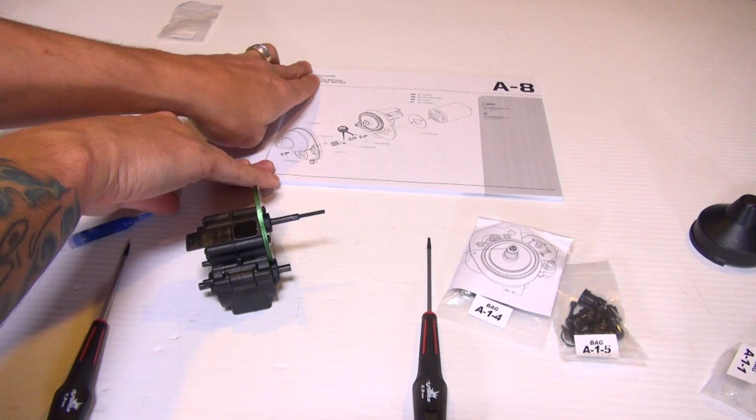What does step 7 have for us to do? Aha, we're assembling the slipper clutch. What is a slipper clutch?

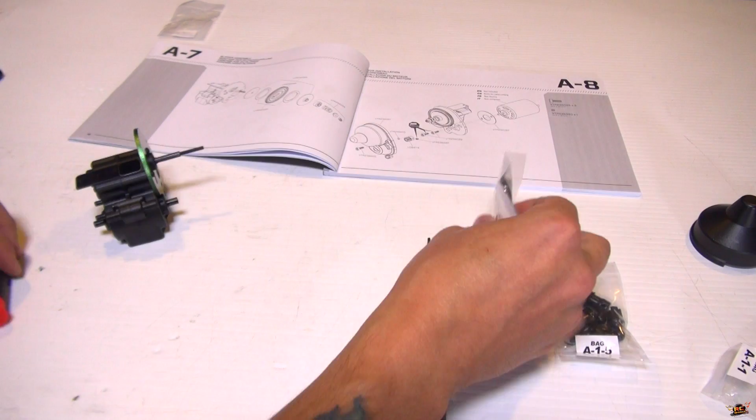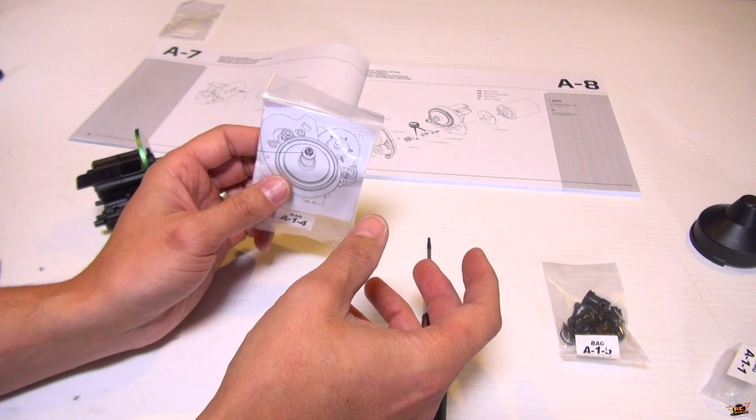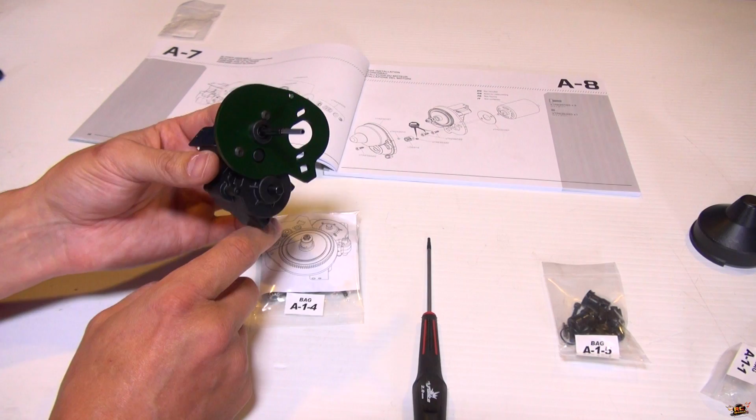I'll tell you for those that don't know. A slipper clutch is basically a spur gear, a spring, and a slipping system that activates when your wheels are having a hard time turning because they're bound up in a tree root, you're in too much mud, or you're trying to pull weight or pull your buddy out. If the motor is torquing the transmission too much, you don't want all those little gears inside to snap their teeth, because once that happens, you're going to have a lot of work to take it apart and replace it.

So they came out years ago with a slipper clutch that, when it torques too much, you can use the adjustment screw and spring. So if it does torque your wheels too much, your transmission wheel will actually just slip instead of transferring the power back to the transmission and breaking those teeth.

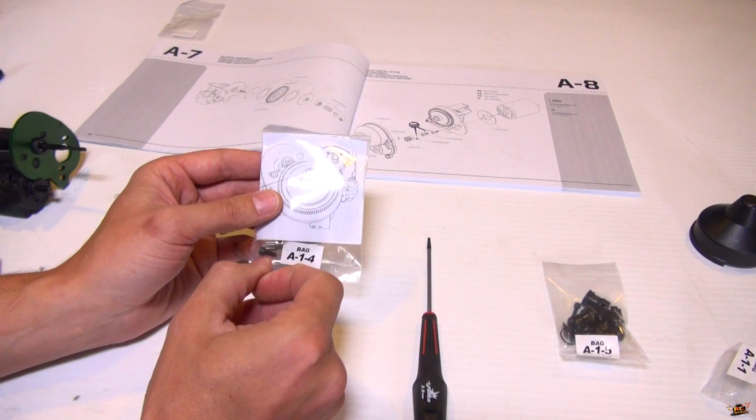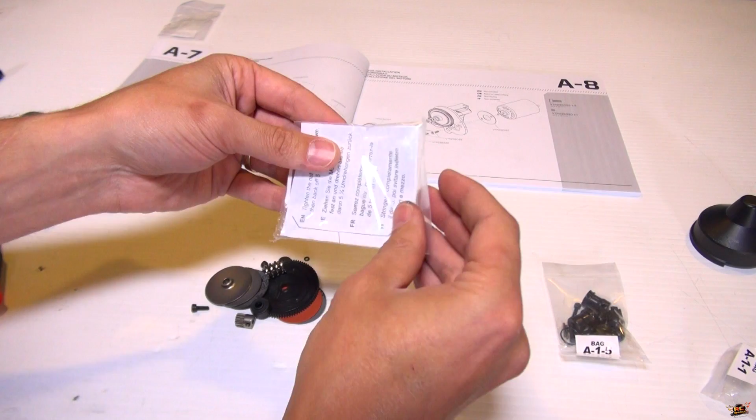So bag A-1-4. Let's slice in, see what you got for me. Okay, very small parts, so I want to be careful here. And instructions as well: tighten the nut all the way down, and I'll get to that in a second.

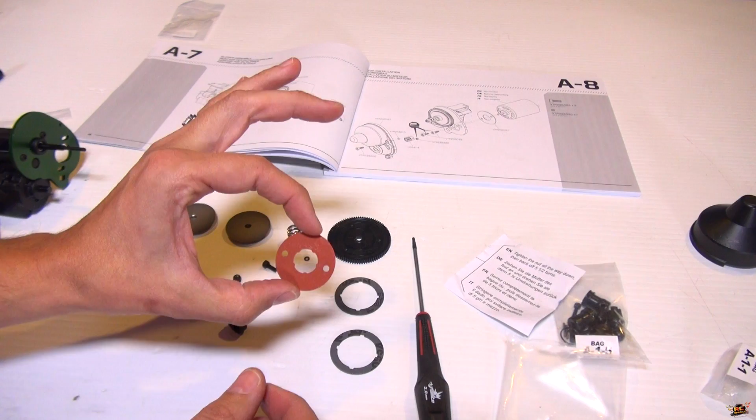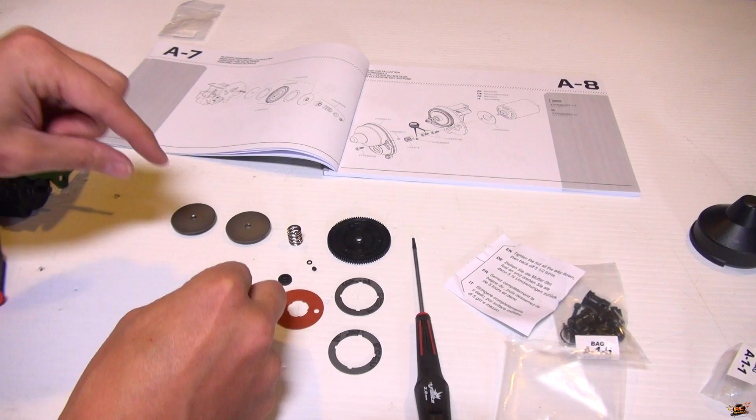Then back off 5.5 turns. No problem. Let's look at the parts we have here so you guys aren't intimidated if you're building. Here is the spur gear. Here are parts of the slipper clutch. Here's the slip plate itself. There is a very small set screw, a very small washer, a larger piece of plastic, a little round O, 1, 2, 3 screws, and a piece to match the big O with a nut and a pinion gear.

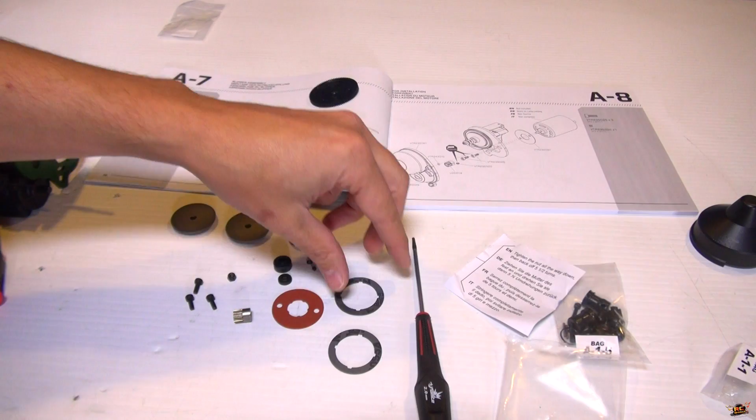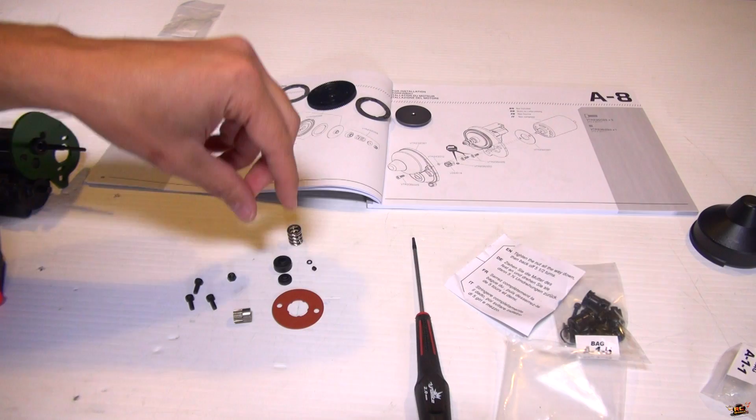No worries. So what am I looking at here? If I lay this out like I discussed earlier, there's one. This one's going to go on the front. This one will go on the back. Where is the plate? Here's one of the plates that will attach to the transmission housing. And here's one on the front, followed by this piece, the spring, and it looks like this fella, and the nut.

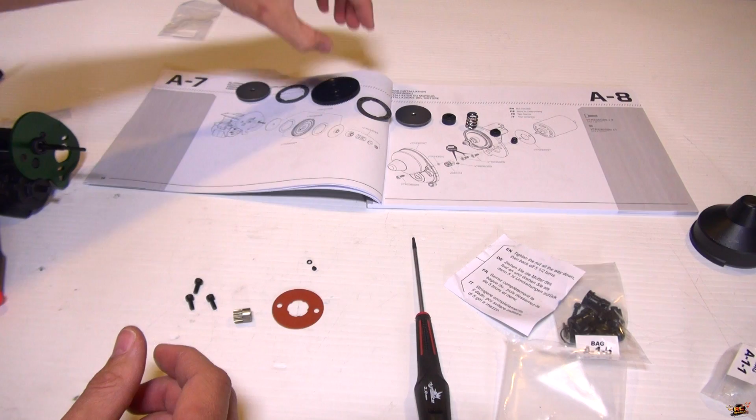Okay, so this long line of parts is going to assemble in a very simple way, if you'd like to see. What, do they have a step number 1? Nope, they're just going to let me go ahead and do it. No problem. So with this one, these will be different on the back. Nope, they're identical. That's what assuming gets for me.

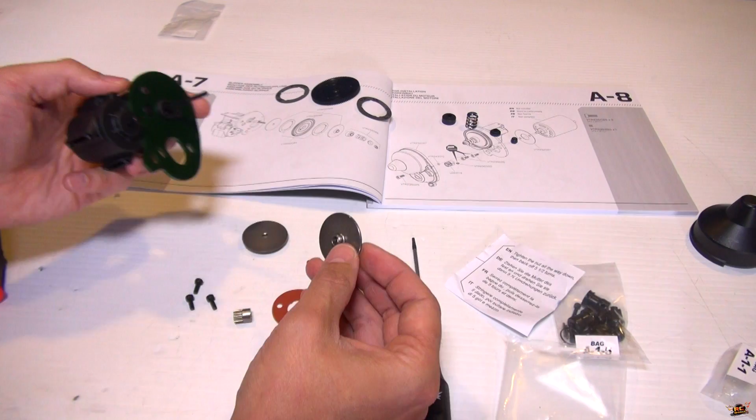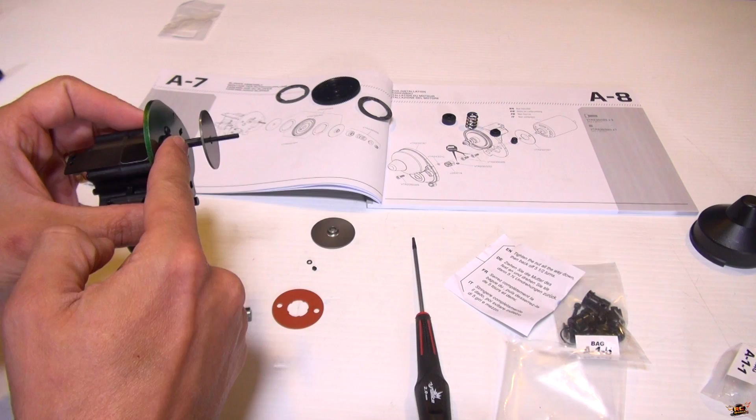Obviously the design has changed a little bit. So if I'm looking at this one, I just want to see, because I think it is, yeah, they are the same. So this one will slide straight back, yes, but it only goes to there. Very interesting, is there a reason why? Nope. It does go all the way down, you just had to wiggle it into place over the flat slots. Yep, I just said fat slots.

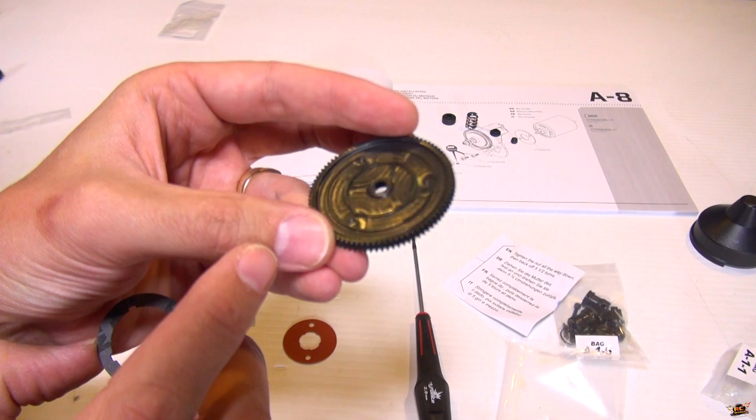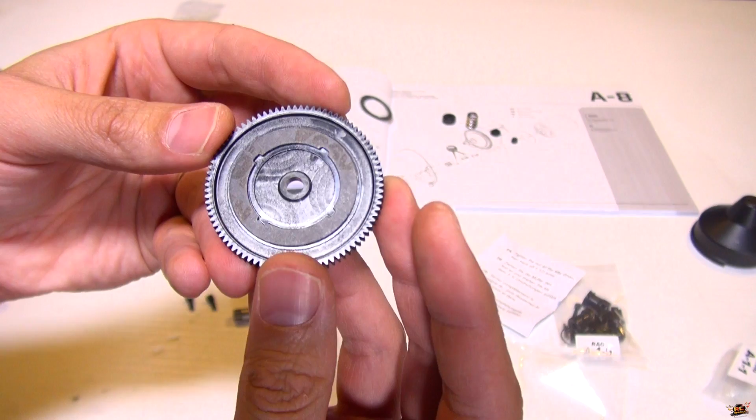Always fun in RC. Okay, so then I'll take this fella right here. I'm going to look at the giant spur gear. You'll also see that there's tabs. Let's see if I can show you with the light. There we go, you see those little plastic tabs that are on the inside ring? Here, I'll show you what I mean, because this will fit right into place. Ta-da! That's what actually holds that in place. You can see those tabs clearly now.

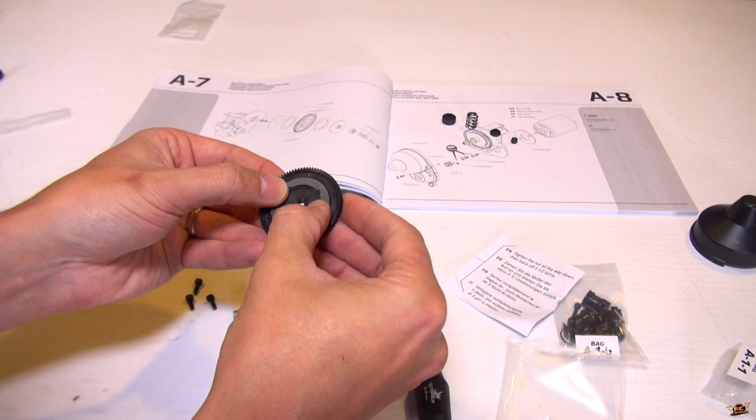So I'm going to do that on the front and on, oops, wrong one. That is in place. I'm actually going to flip that over. It doesn't feel like it's there, right? Let's do it this way instead. Yep, so the words are facing up, it fits much better. Maybe it's my imagination, or maybe it's just this particular one, but I like that.

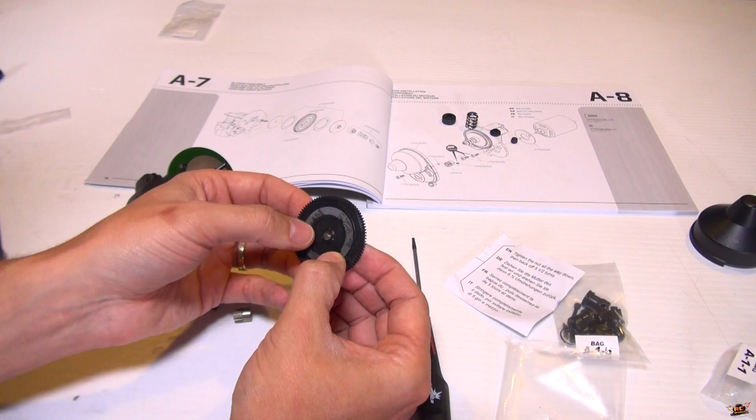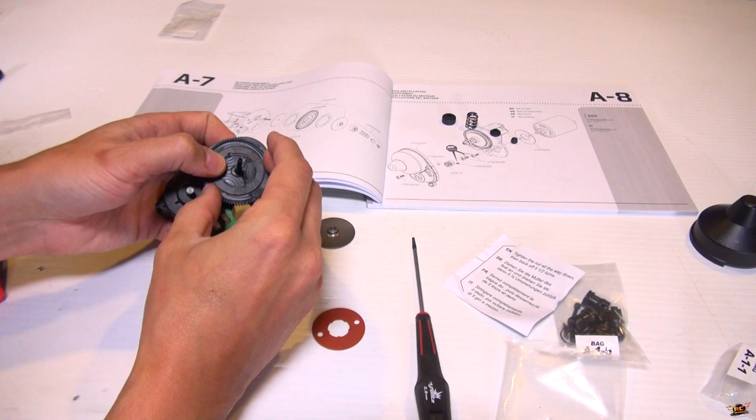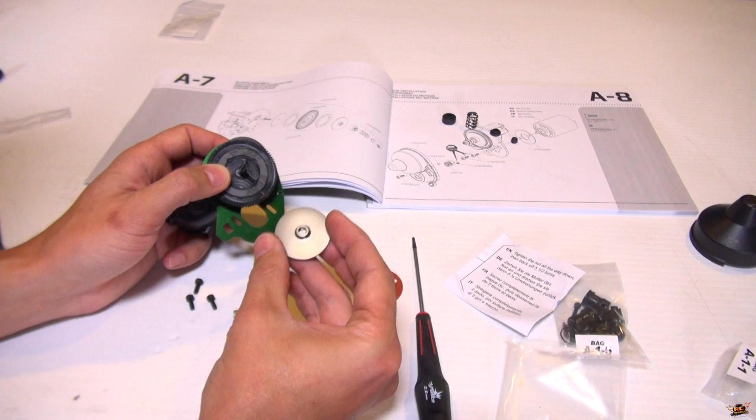I'm going to go ahead and put this into place because those slip plates are there, those little rings are there already. Weird, what about this little fella, where does it go? Ah, this is for the motor, my friends. This isn't the slip plate, these are the slip plates. Very nice indeed, I'm learning with you guys. That's what I do, make sure that they're all fitting.

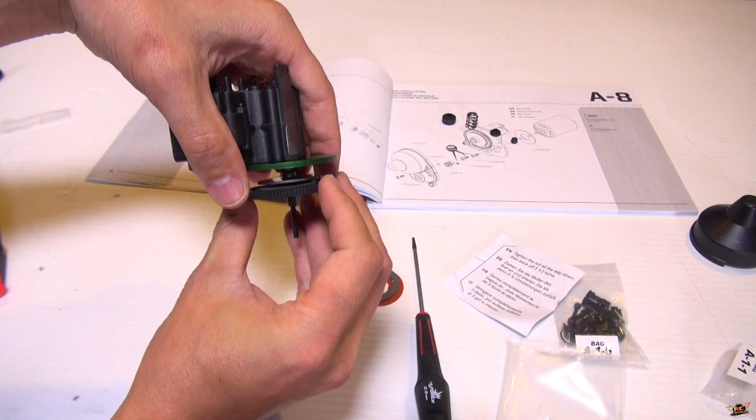Look at that, I wasn't careful, so we're going to take this one out. It slid out of place. So there's a warning for you guys: make sure you've got it and you're paying attention. And it's easier when you're not filming. No excuses, I'm a pro at this. Quite the opposite, I'm still learning. So there we are, I'll put those words up because it just felt better.

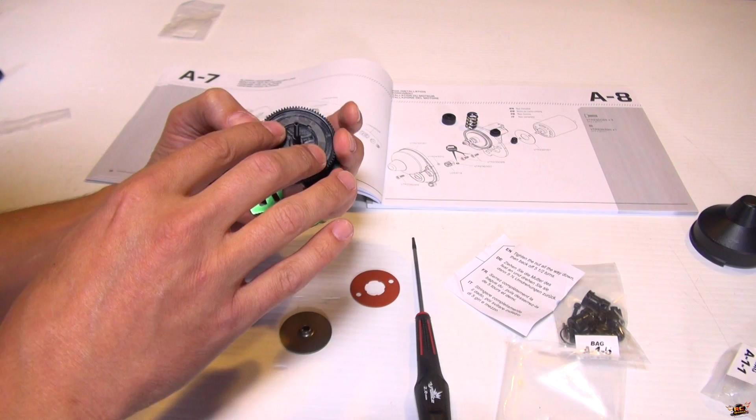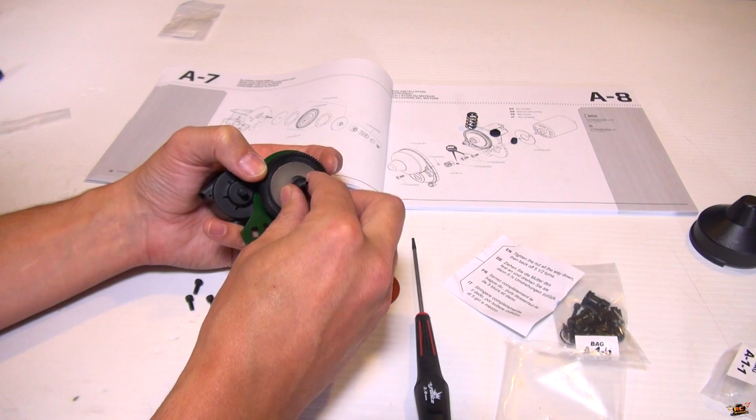And back into place. Here comes this one. Turn it so it lines up, like so. Then I'm going to take that big dog plastic housing and stick this over. I'll take the spring just the way we've laid it out, take that little dog housing, there we go, and then we got the nut.

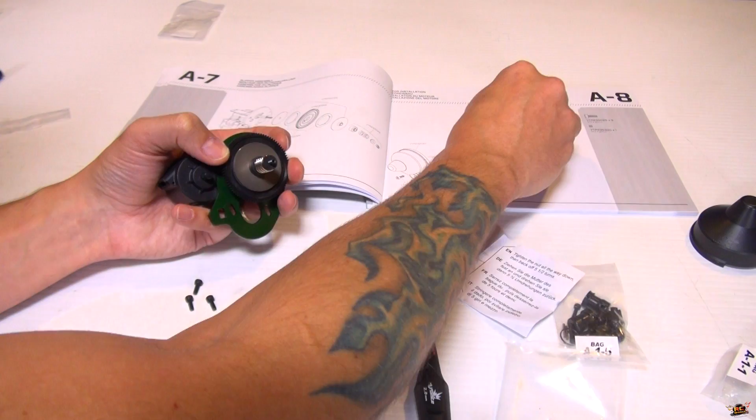So the shaft that I used the Loctite on is actually for the slipper clutch, and we can turn that once we're done. But I'll use my cross wrench. Where did that little fella go? Perfect opportunity to open up the bag. Now I could have been using the Allen keys that are provided, but I do have my drivers, which I find a little easier on my fingers to use.

Cross wrench - the reason I like the cross wrench is it gives you a whole bunch of options for turning nuts. So I'm going to tighten this right down, just like it says. I'm going to hold the spur gear in place with my hand - doesn't hurt. And I'm torquing it all the way down, down, down, down, down.

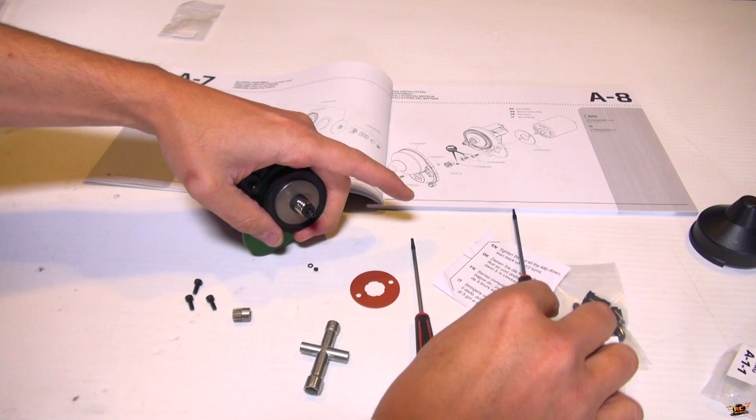There. Now I could have adjusted this. In fact, what I'll do is back this off a little bit and adjust it so it turns into place just a little bit more, so I don't have that sticking out too far. I guess I can't do too much because it's already in there. Note to self, should have turned it in just a little bit more. But let's see if I can turn it now without snapping anything. Not too much resistance, not a big deal. I'll take care of that a little later, if it's an issue.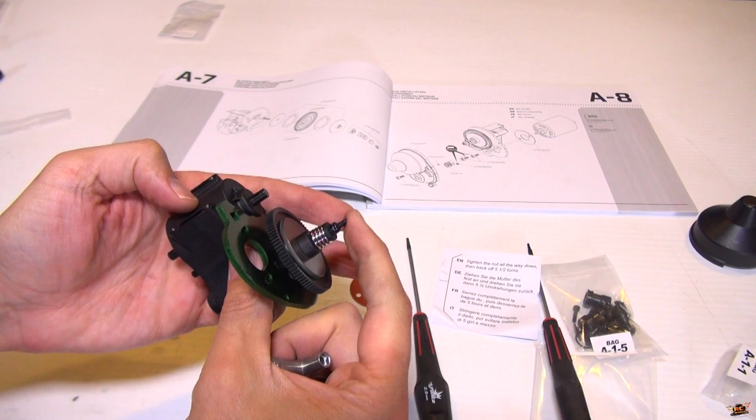There we are. So it does stick out quite a bit. I could take care of that if I wanted, but no big deal, because I'm supposed to back it off 5.5 turns. So there, it's completely down. It's not turned too tight. I'm going to go full turns, so this one I'll have to go rotation the full time. So 1, 2, 3, 4, 5, and then a half, like that.

Now I imagine that's going to be a pretty loose slipper clutch and I'll want to tighten that up. But again, being brand new to this transmission, I'm just following the instructions, so no worries, I can always tighten that up easy enough. Now, what am I looking at here? So this part is done for the slipper assembly.

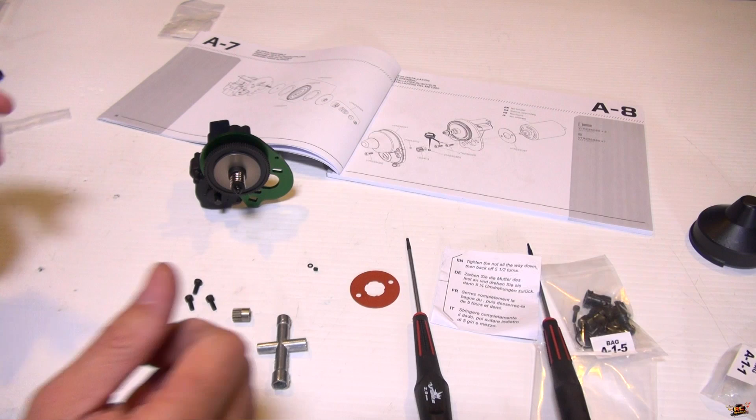Now the motor installation comes next. Now what kind of motor and ESC am I going to use? Horizon Hobby actually suggests that you use the Tekin FXR and 35 turn combo. Oh, it's like bringing Old Faithful to the counter - my good old friends at Tekin. I've been using these products for years and years, and I've had very good luck with them. So the fact that Horizon Hobby is telling you to use these as the suggested one makes it all the better.

Now I'm going to slide this out. This is the heavy duty hand wound - is this hand wound? I believe the heavy duty ones are. The brushed motor - I like brushed motors simply because you can put brushed motors into clean water and they still run. You still have to do maintenance and clean the bearings and oil everything and clean the brushes, but these actually do very well. In mud, not so much.

I noticed that once you get mud in these brushes, these type of motors tend to give you a little bit of trouble, but if you rinse them out, you're pretty much good to go. So 35 turn brushed, which is not included with the kit. You have to buy these extra, like that whole crawler combo I just showed you with the ESC, which is the brain, and this you have to buy separately, so be prepared.

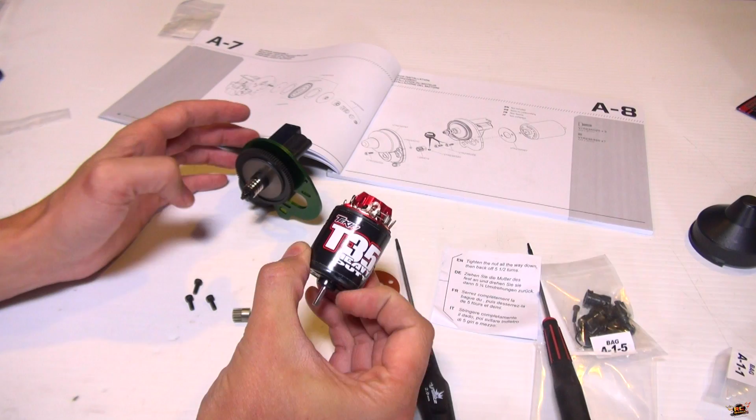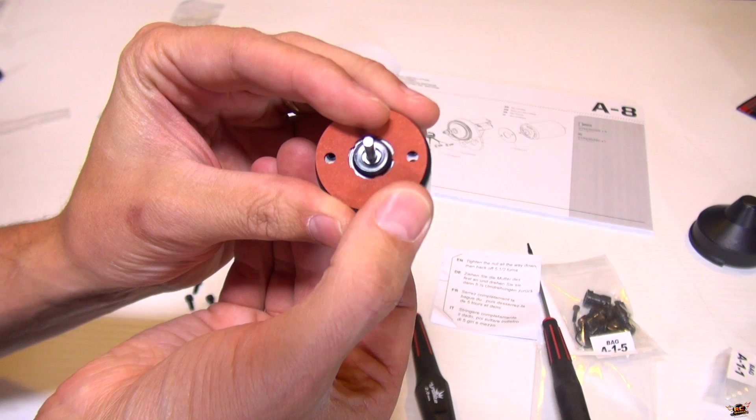Now I'm going to see that the motor is actually getting the motor plate. That's going to slide on and it's going to line up with the mounting holes. Now there's two positions for mounting depending on which side you want your motor to face up or down. Maybe it doesn't matter to you and you can move on right past it.

What am I looking at here? So these look like the motor mount screws. This little set screw is going to go with the pinion. The pinion itself is a 14 tooth, and that's what the little washer is for as well. It looks like the washer is going to go on the inside of one of the screws, which is going to be mounting it to the plate.

Okay, good, so thread lock - where is my thread lock on? Because it's actually asking me for a little bit of thread lock. So I'll worry about that motor plate in a second, and I'm just going to have a peek at where these line up on this aluminum motor plate. Really, this is not a plate, but I could call it a motor mounting disc, if that makes you guys happy. So probably about there, but if I wanted the Tekin name sticking out, mount it right about there.

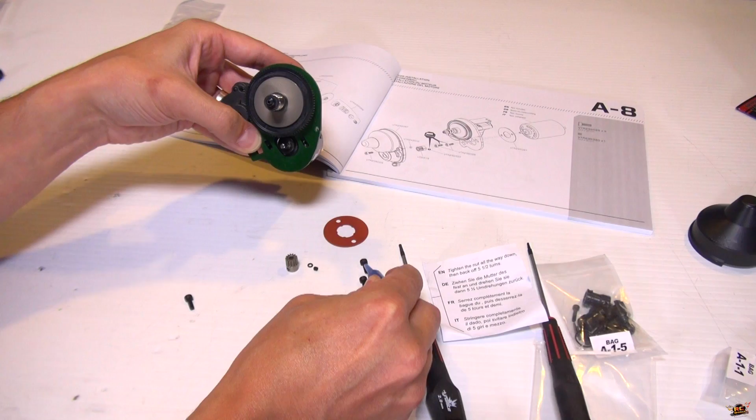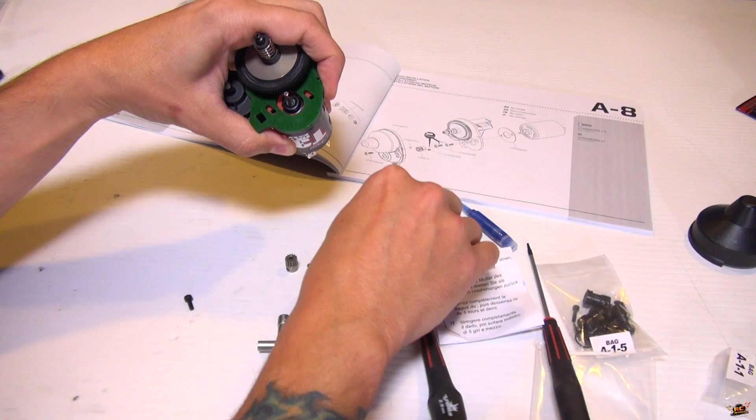So what I'm going to do is go ahead and just thread lock a little tiny bit onto these screws, the motor mount screws. Get this plate in place, like so, and then line it up with the holes on the transmission. Just roughly, I can always adjust it. Get the screw on the end of the driver.

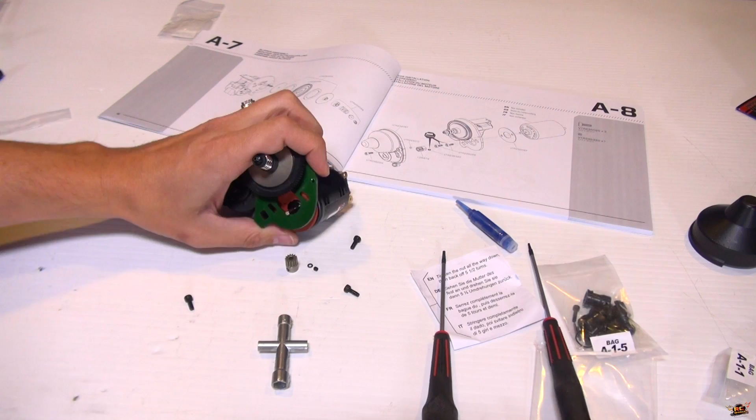You need multiple hands sometimes when you're building these. Oh, I need a bigger driver. What do I got? This one was the 2mm. What do I need, a 2.5? I bet 2.5 fits perfectly on there.

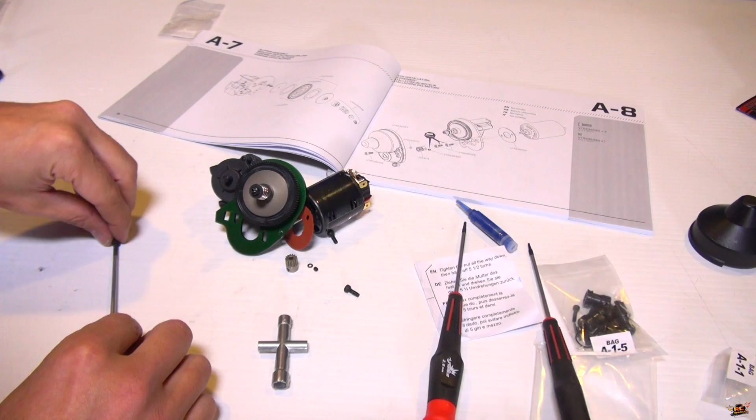Let's use the one that I used the thread lock on. Thread lock won't dry on you until it's in the absence of oxygen, so you've got time to work with. It's not really a glue.

There we are, come on. It's hard to do on camera, showing everything. I'm just going to get those started. I don't need to tighten anything down yet, just kind of holding it in place so I can still adjust.

And as soon as I said perfecto, the motor disc slipped on me. Get in there, hold on, I need to have a look at this again. There, perfect. Real life RC building right here.

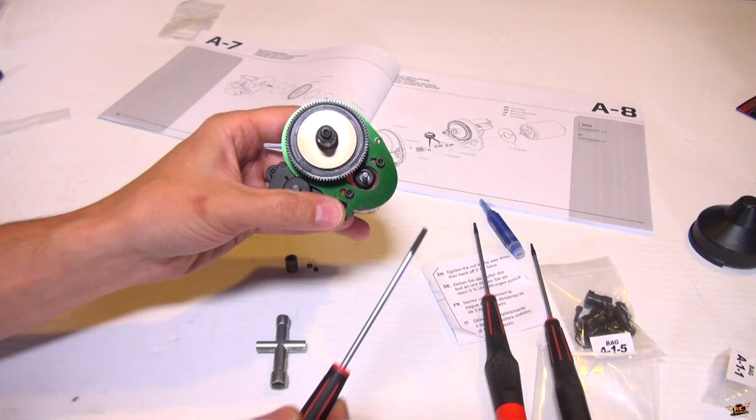You'll notice these screws are in slots, and these slots are actually quite wide. Don't worry if you're new at this, this is a bonus because it allows you to adjust your motor left and right depending on the pinion size. Why would you adjust the pinion size? Sometimes you want more speed or more torque, and depending on the size of pinion and spur gear you have, you're going to want to move your motor left and right. So that's what that's in place for.

That's just sitting there temporarily. So it's asking me next for the screw that will be going through here, but I'm not going to do that yet because I need to add a little bit of Loctite to this small set screw that I have not lost yet. I add it to the end just like so, not too much, just a tiny bit, and I start to pre-thread the pinion.

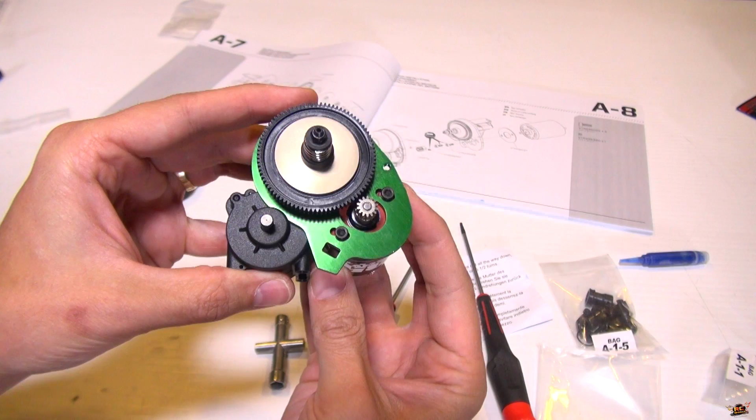There is a flat spot on most motor shafts, see, it's not completely round. That's where you're going to want to line up your pinion. Because the motor's not tightened down, I can move it right away and show you that I haven't tightened the pinion down, but you're going to want to move your pinion together with your spur gear so you have about 1 millimeter of space. You don't want it jammed in there because it'll be too tight, but you want to move it apart just like so, so you can work with it.

People have different theories on how far apart things should be, and I say it's totally up to you. You find a comfortable spot, a comfortable area. Tighten down your motor with those motor mount bolts.

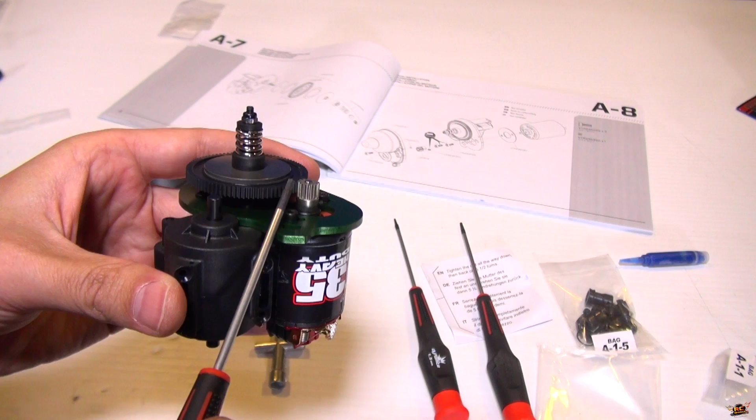Perfect, and now that it's mounted properly and I've got a good flush, lined up nice and flush there, I'm going to tighten down the pinion set screw. Not too tight though, because once you strip it, you're kind of in trouble. Yes, you can get it off, but there. Now let's turn it. Nice. And the resistance you're seeing is from the magnets in the motor.

And it doesn't sound too tight at all. In fact, if I added a little bit of lube to that, it would be almost silent. So there you go, that's how you do that part. Now we want to put the shroud on. The shroud only has one hole for a screw.

So I'll put that, let's see, how do we do this here? If we do it like so, it lines up with the hole on the motor mount plate. Ta-da! Is that correct? It is. And there's a little slot here, so that is how they avoid using more screws.

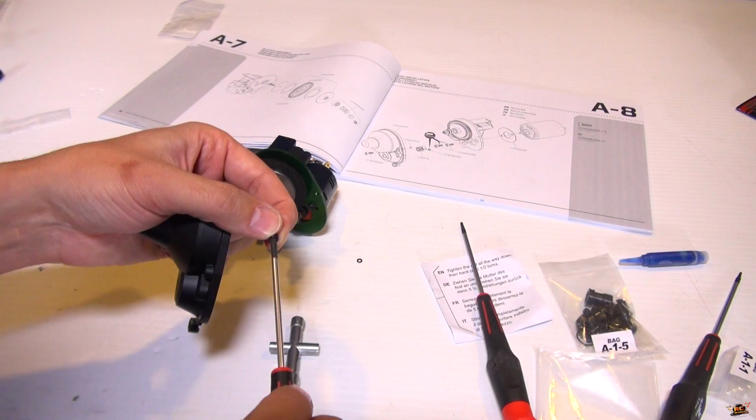Interesting. So with that in place, I'm going to have a look and see that this actually goes on the inside of the shroud. So I'll take this, since this hole is threaded already, thread this through. You can see it's a piece of cake, goes in no problem at all. Take the little washer, oh I see indeed, the washer goes around that little screw and then into place, if I can line it up properly. Come on, get in there. There we go.

And ta-da! Transmission and motor assembly completed. What do we have? Aha. So, for proper gear mesh, this is what it says in the book: it is important to avoid damage to your drivetrain components.

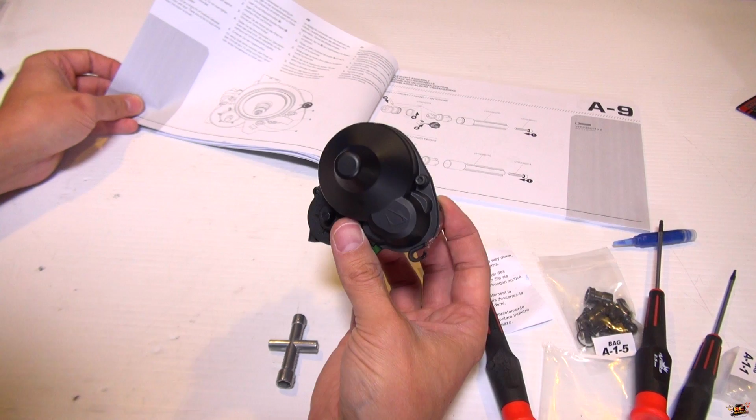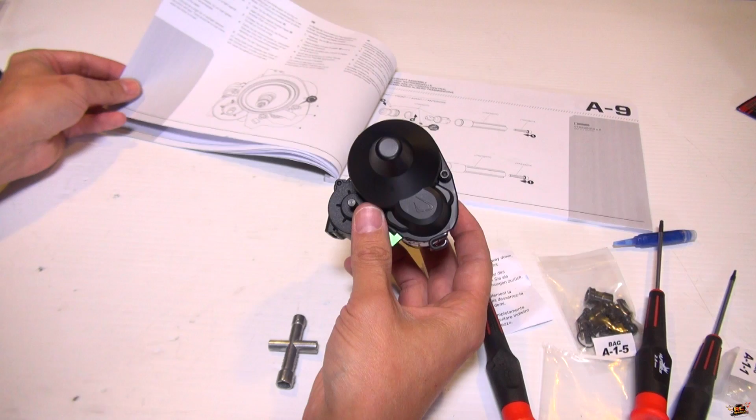Loosen the screws holding the motor in place. Place a small piece of paper in between the pinion and gears. So this is exactly it, you could almost use a piece of your instruction book. Set it in between the pinion and the spur gear, and then tighten down the motor screws. Do not over tighten, and thread lock is recommended. Good, so that is it for today.

Looks like we have drive shaft assembly next. We can tackle that no problem. And I hope you've enjoyed today's build video.